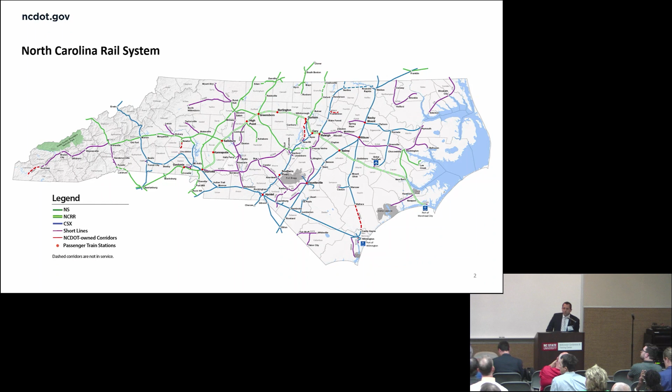We're really looking at it as an asset. Our rail division is looking at this - how do we get more freight moved on this system? How do we get more passenger trains moved on this system? It's about 3,600 miles of rail in this state, and every mile of it is an opportunity. Some of it is not utilized fully. Might only have one train on it a week. Might have a train on it a day. But there are opportunities for us to increase that and take the burden off of our highway and other transportation systems and put more heavy things on the rail system.

Passenger rail. Right now we have one of the most successful passenger rail programs in the country. NC by Train is the brand name that we go by in North Carolina for all of our passenger rail services. This is intercity passenger rail, not commuter rail. Currently we operate 8 daily trains - 2 of them daily to New York, D.C., and other Northeast destinations, and then 8 trains, 4 each way between Charlotte and Raleigh. On July 10th, we'll be adding a 5th train to go to 10 trains a day with a really good departure time out of Raleigh, midday departure, and changing some of our departures out of Charlotte. We're also going to be bringing some faster trains, under 3-hour trains, to that schedule as well. So stay tuned. We'll probably be announcing that service in the next few days.

Other exciting things are, if you've ridden our train service - and actually by a show of hands, who has ridden the train in North Carolina? This is an excellent, excellent thing. Y'all who haven't ridden it, ride it. It's an opportunity to be productive between your destinations.

It's a great price, and usually your company will pay for it, and I'll gladly take the funding for it too.

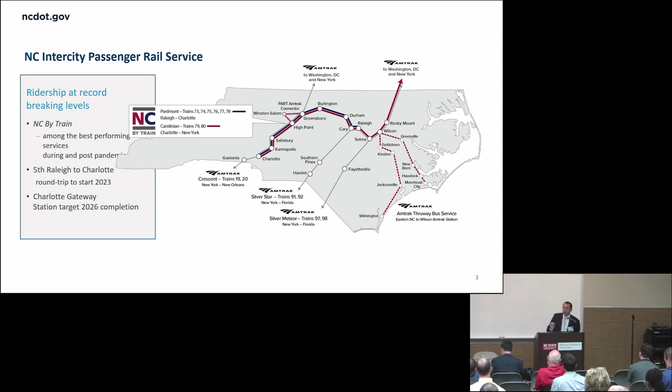One of the great things we're doing is Charlotte Gateway Station. Right now our station in Charlotte is just outside downtown, and we're building a new station right in uptown Charlotte, next to the Panther Stadium and the business district, in the heart of the city. It will be more than a station; it will be a destination. Envision a station with skyscrapers on top of it and every form of transportation connected in one place. It's going to be a great thing.

Part of the success story: we're having our highest ridership in 32 years. We've been running this service since 1990, and last year we handled over 522,000 passengers. We had the highest first quarter ever in 2023, with about 135,000 passengers, and our second best month in April this year. So folks, even with the current service, are really using the train. I think as we add additional services and new stations, we're going to see a lot more people use this to get to and from their locations.

Another interesting data point: the average trip on the Piedmont, Raleigh to Charlotte, is 115 miles, and the average trip on the Carolinian is over 215 miles. So the combination of the two is over 90 million passenger miles per year on those train services. It's a lot of folks, a lot of miles.

Our division doesn't just do passenger trains, we're a project delivery organization. In 2017 we finished one of the biggest rail programs in the country with the Piedmont Improvement Program. We continue that today with over $1 billion currently managed in the STIP by our division, working closely with our partners, the 14 highway divisions, those that have rail, as well as communities, MPOs, and all kinds of organizations across the state, and of course the great private engineering firms and consulting organizations that you all represent. We're happy to be part of this delivery of rail projects in the state.

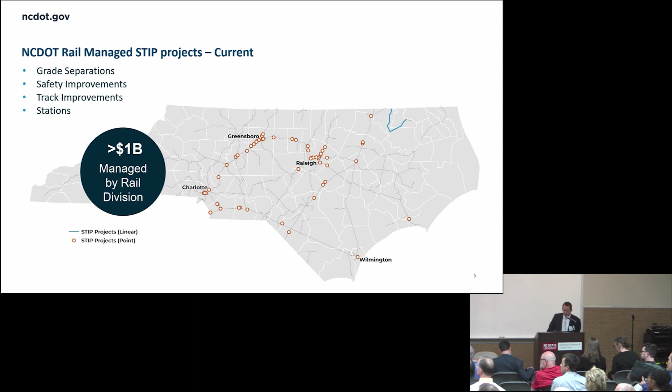FRA has issued a new program called Corridor Identification and Development, and our state is probably one of the most robust in the country in going after this new seed money to develop a statewide passenger rail system. So expanding beyond just the core network between Raleigh and Charlotte, reaching destinations as far west as Asheville, as far east as Morehead City and Wilmington, south to Fayetteville, west to Winston-Salem, and all kinds of points in between.

We submitted 12 corridors under this FRA program, and anyone selected gets an initial $500,000 in project development money to advance that project. We've heard from cities all over the state that they're excited about this and plugging into a system they see as successful in moving people in the future. Hopefully those will be announced late summer, early fall this year, and we'll have a lot of opportunities to move forward with some scoping with you all.

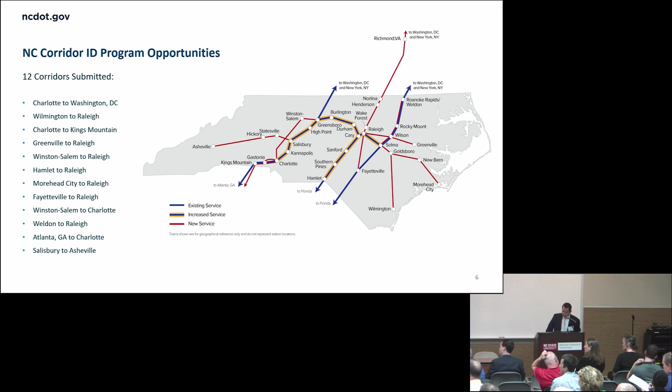But the thing that really ties it together, the thing that will make North Carolina successful in passenger rail, is not just looking at a state-only, intrastate system, but connecting our system to the wider world. And that's where the S-Line project really is important.

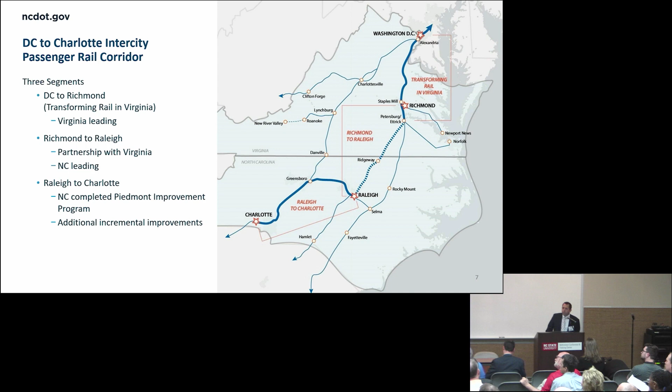Virginia is also seeing record ridership in their system. They have services that extend from Washington, D.C., from the Northeast Corridor, all the way to New York and Boston, and those services connect to the Tidewater region. They also have services that connect out to Roanoke and the western part of their state. They're seeing record ridership as people really look to rail as a productive way to move. But these two systems, other than the Carolinian, are really disconnected. The S-Line, beyond just being a more direct route, is how we create the capacity and the modern railroad of the future to really advance rail in this whole region.

This gives you an idea of the population density connecting the various mega regions along this route. In Virginia, in the D.C. area and points north, 10 million people. In the Tidewater and Richmond area, over 3 million people. And in North Carolina, over 6 million today. That's a total of about 20 million people directly connected along this corridor, and that's expected to increase to 25 million by 2040.

And how do you move that number of people? And how do you do it productively? Well, you look at advanced transportation systems.

So we're looking at a corridor that cuts over an hour of travel time off of that route between Virginia and North Carolina, but also does it in a way you can take multiple trains a day, and it increases the capacity between those destinations. It's critical to further expanding this North Carolina passenger rail system. It increases the freight network resiliency, has the environmental benefits of rail by the sheer volume of people you can put on a train. And then, of course, it expands service to disadvantaged and underserved regions. This is an interstate system that allows non-vehicular populations, or folks that choose to leave their vehicle home, ways to get around without a vehicle.

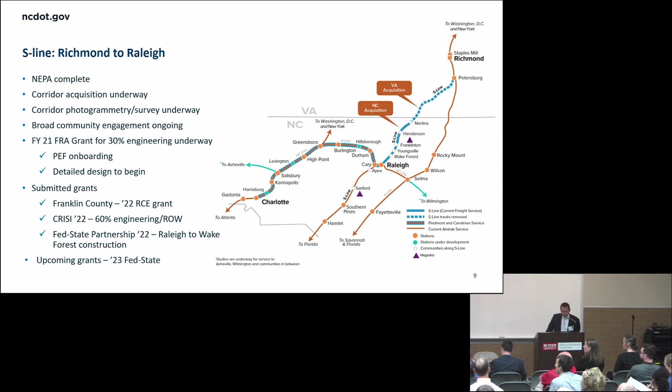That first segment will extend service up to Wake Forest with our current Piedmont service. The most complicated piece of the work is down in that area, so that's really what piece we want to get going on immediately. And then we're preparing for upcoming grants, looking at fiscal year '23 and '24. I'll go into those in a little more detail.

I mentioned that this is a lot of roadway design in this project. We want to untangle the railroad and roadway conflicts. We want to make this a grade-separated corridor, just like an interstate corridor. I was moved by Drew Cox's presentation on I-95—he's very passionate about that project. We're passionate about this too. We want to see a good facility built.

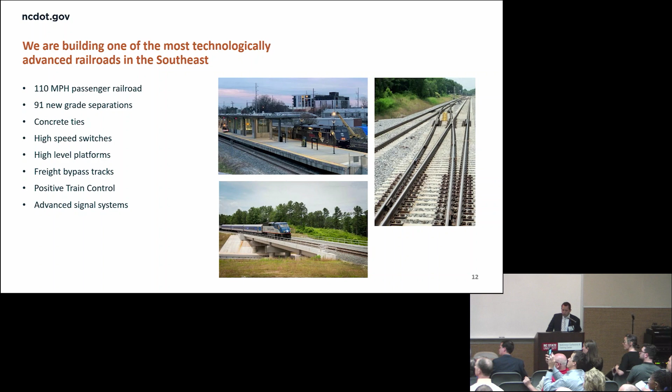And we are building one of the most technologically advanced railroads in the Southeast: 110 miles an hour, 91 new grade separations, no at-grade crossings, concrete ties, high-speed switches, high-level platforms so you can board right onto the train at a level platform, freight bypass tracks so there's reduced conflict where freight needs high and wide clearance for their loads, positive train control which is advanced signal systems, and the like.

So the team's out there. We've got the survey underway. We've been working with DOT location surveys, aviation division. We've been working with photogrammetry, using LiDAR to do the top of rail survey on the track, trying to get at that really fast.

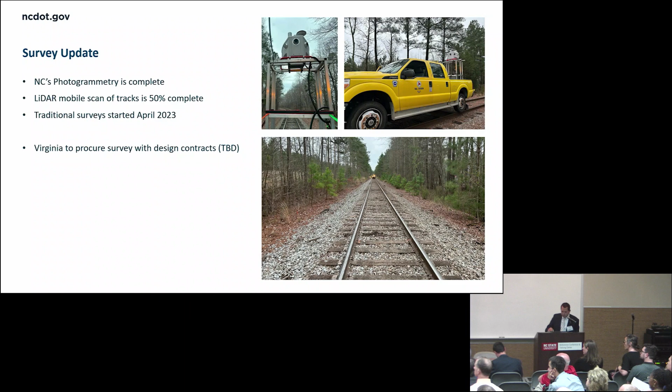And then we've got traditional survey starting. We really need to get that Raleigh to Wake Forest segment going quick, so we're ready to start building that piece right away. And Virginia is doing their survey procurement and design contracts together, and that date is to be determined.

Working on environmental screening. We're making sure that any change in condition out there from the completion of the record of decision in 2017 is accommodated or noted. And we're working with our partners at FRA to make sure we don't need to make any adjustments, or work with them to make adjustments to the document through the reevaluation process.

We're realigning the mess out of this railroad. It was built back in 1900. The curves that were laid out for a breakneck speed of 50 miles an hour are not going to work for 110 miles an hour. And we don't want to put vehicles in conflict with a 110-mile-an-hour train. So we are doing a lot of new location work. You can see it right here, and it goes all up and down the line. So we're building the railroad of the future and the roadways of the future.

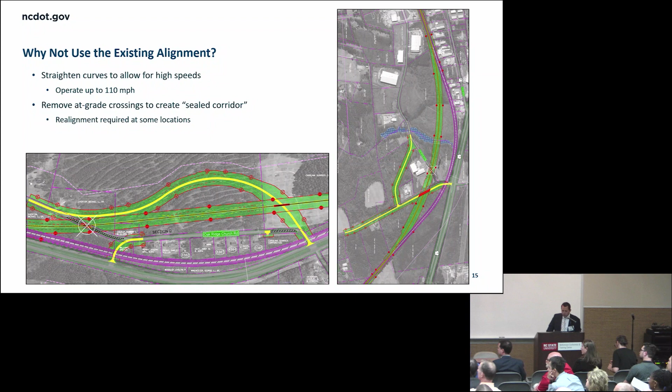Got a couple that are already in the STIP. Because we had completed the record of decision in 2017, we immediately went to the STIP. We've got 4 projects in there currently, grade separations between Raleigh and Wake Forest that are funded, then being leveraged for the grants, and we're advancing them to construction to happen over the next several years.

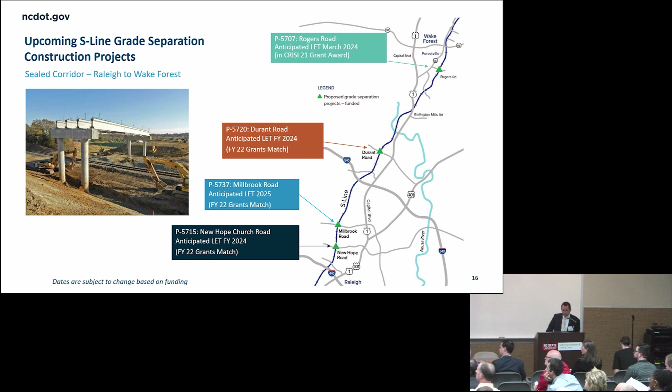I know that Chris Warner would be happy to say that we're following PDN. We are, and working through that process with the Technical Services Unit and all the other supporting units. It really is a partnership. We can't do this project on our own. We need the support of all the department units. We need the support of the industry, and we need everybody's best ideas to get this thing done.

On procurement, we've got the corridor being broken into multiple contracts. You can imagine, 162 miles is a lot to bite off. So we've got the RFPs being issued, and again, anticipating the second half of 2023.

Here's a schedule. Every time I bring up a schedule, my boss tells me it's not fast enough. I say we can only move as fast as we got funding, but if we have funding, we can move fast. So we're going to be looking at alternative delivery methods and the like. But this is basically the 30% production schedule. Unless the money drops out of the sky, we're going to be—and then things have to move even faster. But that's what we're hopeful for. We need to start to see this project hit the ground and become something that we can put trains on and actually start operating as quickly as possible to show that we can deliver.

Lots of grant opportunities upcoming. The biggest program at FRA that supports this type of work is what they call the Fed-State Partnership for Intercity Passenger Rail. There's billions and billions of dollars in that program, and we're one of the most competitive, most ready projects nationwide to take advantage of the funding, as long as we've got the non-federal match.

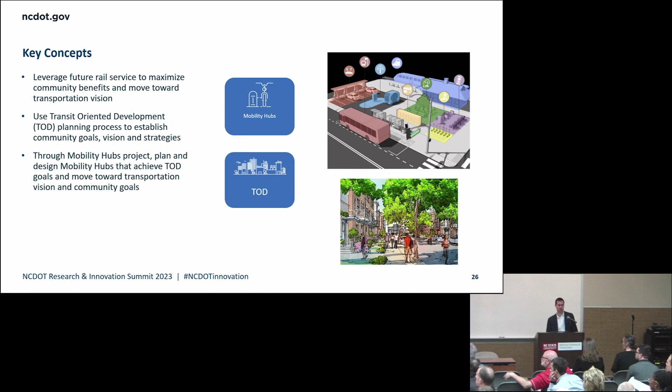The Integrated Mobility Division covers public transportation, bicycle, and pedestrian programs for the state. It used to be 2 separate divisions, and we merged in 2019.

What we're doing is moving towards a vision where we eliminate transportation barriers and have an equitable system that works for everyone, where unmet needs in transportation are minimized, where everyone has equal access to opportunities and services, where our multimodal options rival driving in terms of time, convenience, and cost. You may have heard this in the last presentation for Complete Streets as well, but these are important tenets of everything that we do.

And making it eventually as easy to get places without a car as it is for all of us now to jump in our car and drive anywhere in the state, given the vast miles of roads that we have in our good road state.

And eventually zero transportation-related fatalities, injuries, or greenhouse gas emissions. That's the vision we're working towards. If we're successful with achieving our goals, we will realize a system where these outcomes are occurring every day.

We think there's a kind of ecosystem that will exist with these 4 pillars to help us achieve those outcomes. First, we have to have layers of multimodal services across the state at the local level to connect you to places nearby, interlocal to connect you across your community, regional to connect you to other communities, and interregional to connect you to other regions.

Intercity rail and passenger rail services is one very key backbone component of having that layered approach to multimodal services across the state.

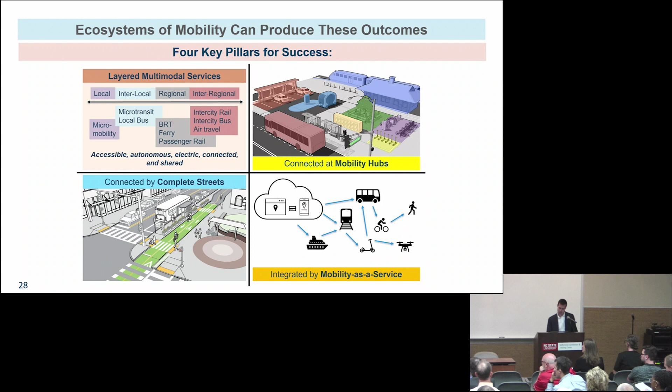A lot of how we're working to plan that and move towards that is through our transit-oriented development project. We received a grant from the Federal Transit Administration in 2020, $900,000, matched with contributions from each of the participating communities. This has a few key focus areas.

A lot of it is about establishing that vision for the overall corridor, but also vision and goals for each community as it relates to the project. We are identifying station locations and station areas to study further, doing market impact analyses, looking at housing impacts and housing conditions, and then thinking again about the other transit modes and services and how they connect to the S-Line in the future.

So a lot of the implementation plans we're creating are around land use planning, zoning, and regulatory policy changes, infrastructure investments, and funding strategies, again to help the community achieve its goals as it relates to the project. Central to this project, and very similar to what Jason covered, is partnerships and coordination, community engagement to learn what those goals are, and to make sure this is a community-driven process.

A few key values have really driven a lot of this work. It's very much an equity-driven process and outcomes, community champion visioning, a lot of community engagement, and a lot of interest and input from community leaders.

Implementation-focused market analysis that's grounded in place and reality. It's very specific to each community. And then placemaking through integration of land use, design, and transportation.

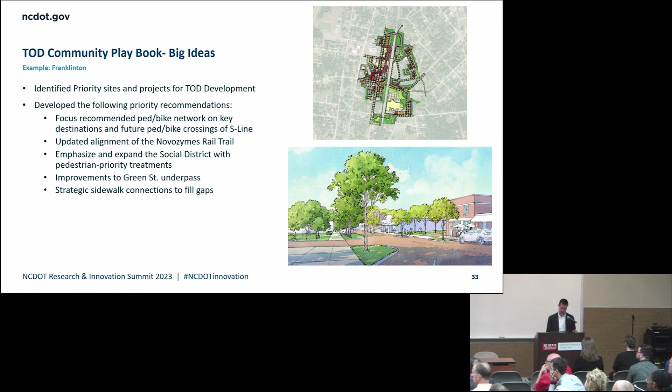changes to policies and programs and identifying funding to move towards those goals. This is some examples of the types of recommendations for Franklinton, and here's the implementation side as well, with additional examples of what we're including. These are very specific, tangible recommendations they can move forward with quickly, knowing this will be a multi-year process to move forward.

Some lessons learned from this planning process: obviously, there's constant change. A lot of these communities are growing very quickly, so there's changes occurring to land use as we're doing the planning and studying. Being able to integrate all of those other plans and moving pieces as we do this plan is a challenge. But that's why stakeholder engagement and having local leaders involved throughout the process is so important, so they can inform us of those other plans and strategies.

Another challenge, and what's really made this very beneficial, I think, is making tailored plans for each community - specific recommendations based on the needs of each community.

Another important piece is coordination - we have what's called an S-Line coalition. We've had advisory committees at the elected official level and technical committees at the staff level meeting frequently throughout this project to advise us on issues in their community. That has served a few purposes: it's informing us to help guide the study, but it's also driving momentum and interest in this project.

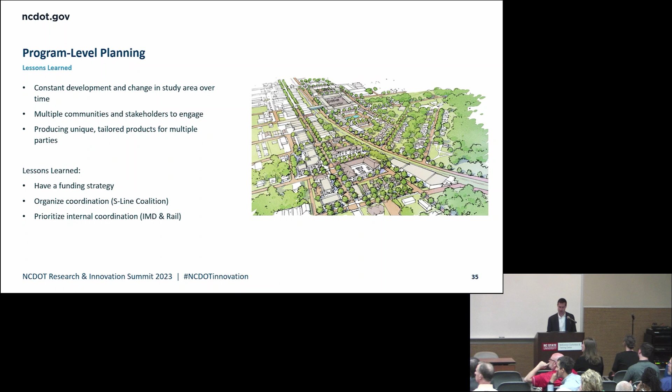Driving discussions locally, it's really a catalyst for them to start strategy development in earnest - not just doing the plan, but we have some communities actively working to implement it as it's being finalized because of the momentum around this project. So we're really excited for the next phase. Once we've wrapped up the TOD study, which will happen in the next few weeks, we will start our mobility hub planning phase of work.

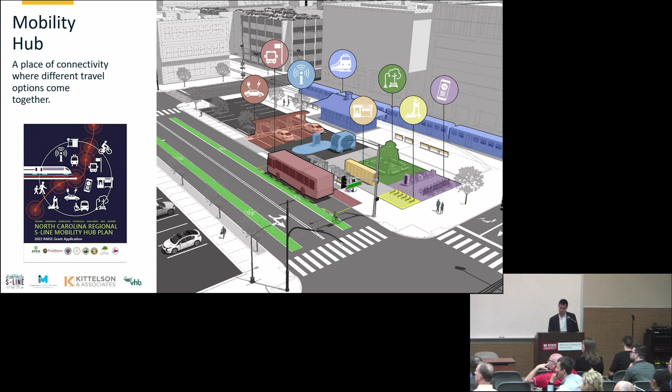So lastly on the mobility hubs - this is really helping us advance planning and design in 7 communities, the next phase and next iteration of work along the S-Line. The TOD work will feed into the mobility hub work. We've identified the broad areas where the hubs will be, and this grant will help us hone in on specific sites and study the feasibility, doing some initial steps of design for those sites.

We also think a key thing here is that mobility hubs may have independent utility from the rail itself. There's a chance we may build some mobility hubs that could be servicing existing transit services now, before service for the S-Line starts in the future. That's the other beauty of this - we can move forward with those if we have funding in place. They'll serve an immediate value for the communities, and then we'll layer in the rail service later.

So that's all we have. Again, we appreciate your attention and the partnership. I know we've worked with many of you in here - a lot of folks in this room are part of this project. It's so critical to make this successful because it's so massive. All of us have to work together to make it work. So thank you, happy to answer any questions.